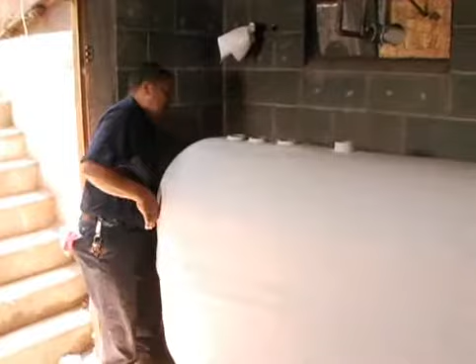This video provides general guidelines for the installation of fiberglass reinforced plastic above ground oil tanks. Throughout this video, we'll also refer to these as FRP tanks. NORA recommends that the specific instructions of the tank manufacturer and all applicable codes and regulations be diligently followed when installing any oil heat equipment.

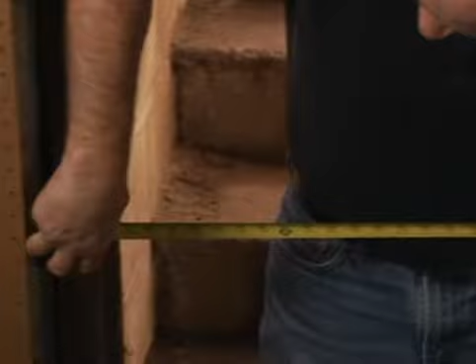Professional tank installations start well before the tank arrives at the job site. By the time the installer arrives to put in the tank, all of the following should have taken place. A company representative has visited the site to explain all of the options that are available, especially the advantages of inside installations. Choosing the right tank and the best location are important decisions, and the customer should be fully informed when making them.

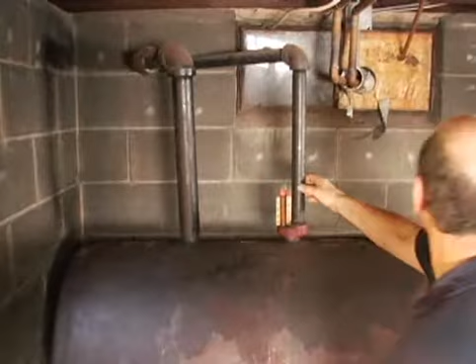It's critical to verify that the new tank will fit into the designated installation area and that a suitable, solid, and stable foundation is present, such as a poured concrete floor. The installation area should also be checked to ensure that all applicable regulations can be met and that oil delivery can be safely made.

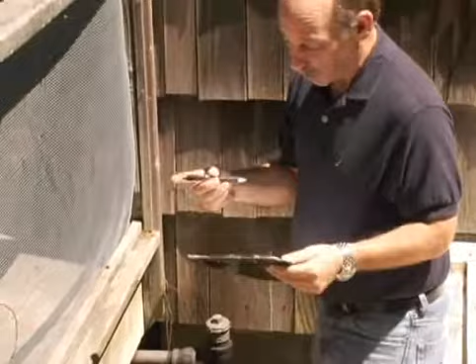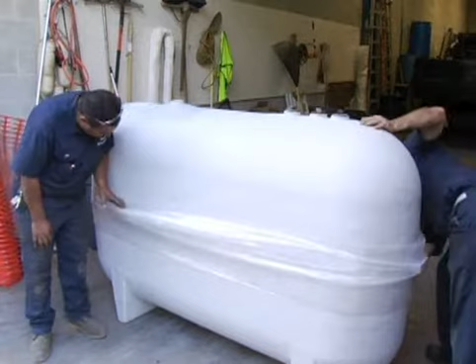Before the installation takes place, all necessary permits should be secured, and the customer's new tank must be received, inspected, and approved. Most importantly, the installers must thoroughly familiarize themselves with the current version of the manufacturer's instructions for the specific tank they will be installing.

The installation crew's job begins when they inspect the tank before loading it onto their vehicle. If any water has accumulated inside the tank, it should be drained at this time. A close visual inspection should follow to determine if there is any unacceptable damage. Unacceptable damage is defined as bruises, impact cracks, or deep scratches extending below the exterior coating of the tank.

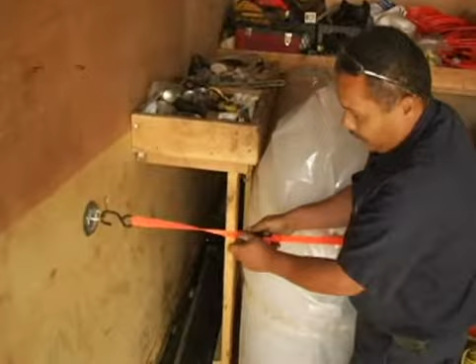Once they are satisfied that the tank is undamaged, they can carry it to their vehicle using the tank's integral handles. Tanks should never be dragged or walked. Once in the vehicle, the tank should be protected and secured to avoid damage during transport. Before heading for the job site, the crew should make sure that they have all necessary equipment and the correct materials in sufficient quantities for the installation.

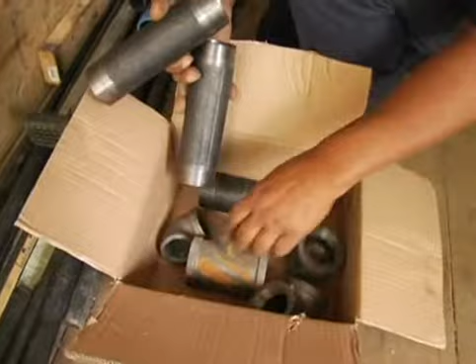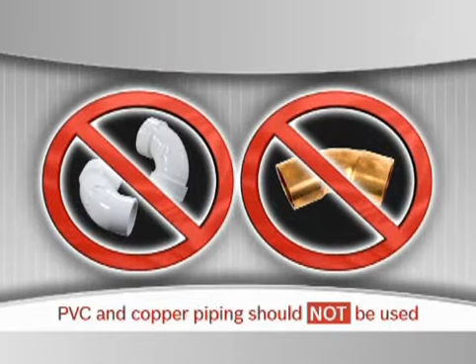Fill and vent pipes are typically Schedule 40 steel pipe connected with malleable fittings. Cast fittings used in steam systems can be easily broken and must not be used when piping oil tanks. PVC and copper piping should never be used for fill or vent piping of oil tanks.

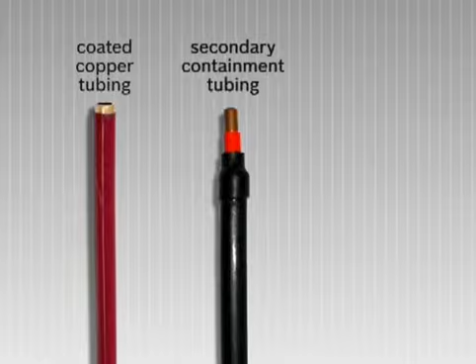In addition to the steel pipe, the crew will need coated copper tubing for the oil supply line, secondary containment if required, a vent alarm, a tank gauge, vent, and fill caps. Also needed are cement, caulking, pipe joint compound, and assorted fittings, nipples, valves, and plugs.

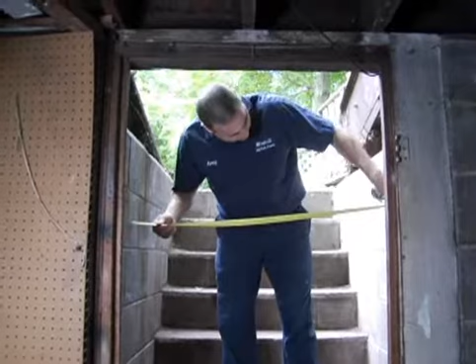Installations vary depending on whether the tank is installed indoors or outdoors. Let's look at an inside installation first. When the crew arrives at the job site, they should check the areas the tank will have to be moved through, as well as the installation site itself. Before moving in the new tank, it's critical to double-check to make sure that the tank will fit and be in compliance with applicable codes. Keep in mind that the tank must be installed on a flat, level, and stable surface, away from heat sources.

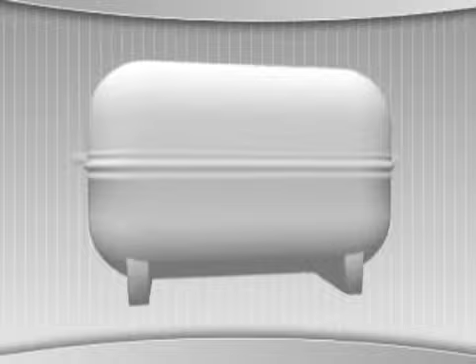Once the crew is satisfied that the installation can proceed as planned, the tank should be carefully removed from the truck and again inspected to be sure that no damage occurred during transportation. Tank testing should now be conducted. This illustration shows the test of a double-walled FRP tank. First, we'll test the integrity of the primary tank. Begin by capping off all the piping connections that aren't being used for the test.

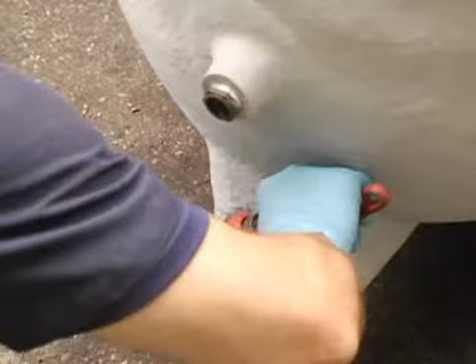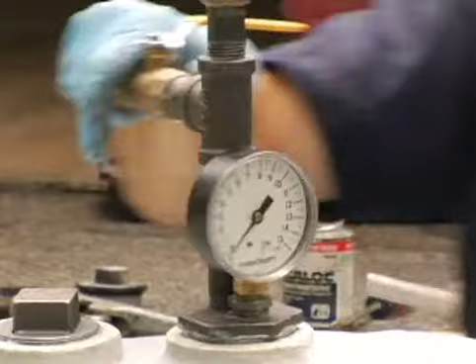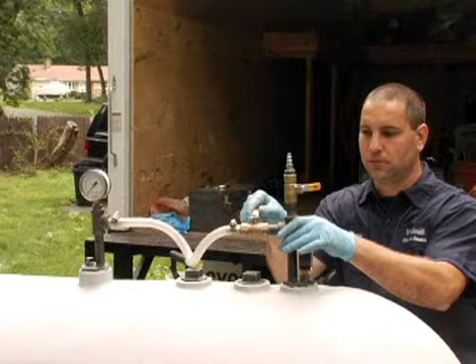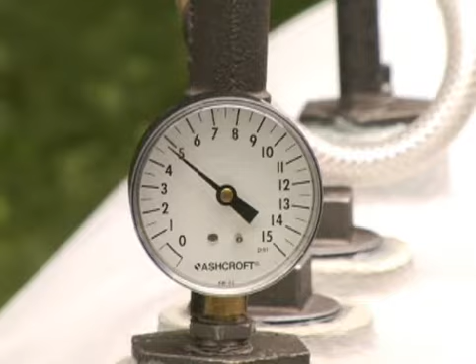Install test equipment consisting of a flow control valve, a 0 to 15 psi pressure gauge, a shutoff valve, an interstitial space test gauge, and a flexible air line connecting the shutoff valve to the vent for the interstitial space, that is, the space between the two tank walls. To begin the test, make sure the shutoff valve is closed to isolate the interstitial space. Pressurize the primary tank to a maximum of 5 psi by opening the control valve. When the pressure reaches 5 psi, close the control valve and remove the pressure source.

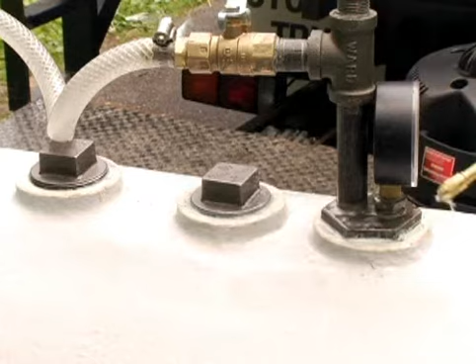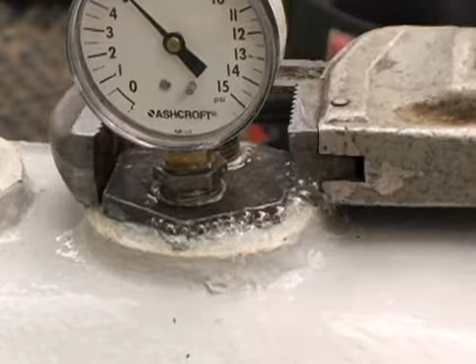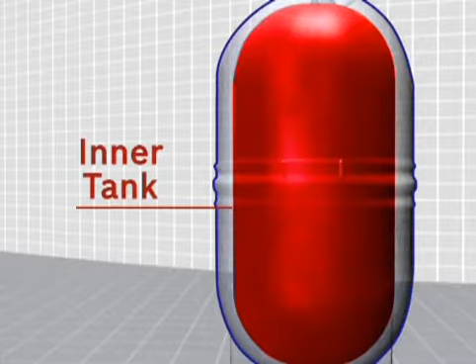Apply a 40:1 solution of water and dishwashing liquid to all the plugged connections. If continuous bubbling is observed at any of the plugged connections, carefully tighten the plug until no more bubbles are observed. If a decline in pressure is observed, or if the interstitial space gauge reads pressure, stop the installation and have your supervisor contact the tank manufacturer. If the pressure holds, the primary tank has passed its test. Following the test of the primary tank, it is critical to test the integrity of the interstitial space. Again, that's the space between the walls of a double-walled tank.

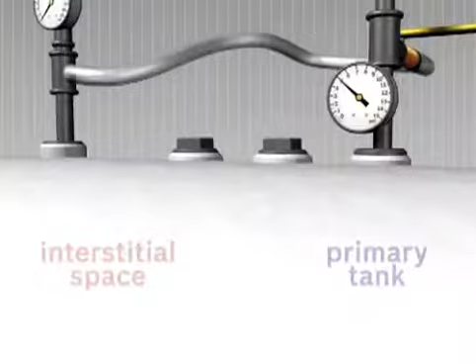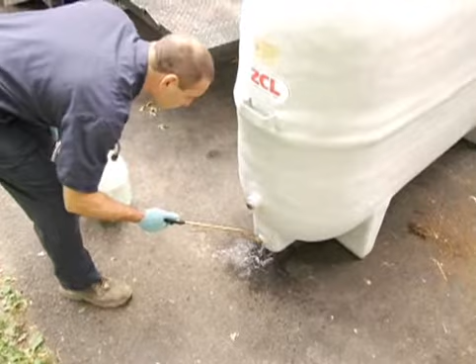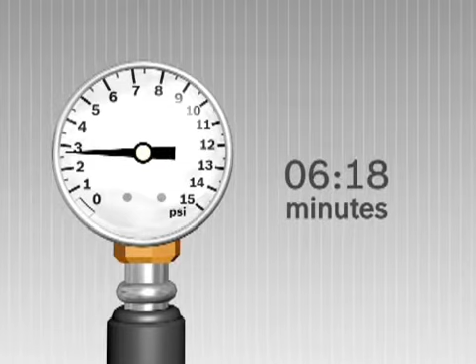Begin this test by opening the shutoff valve and allowing the air from the primary tank to pressurize the interstitial space. Again, apply the soap solution to all threaded connections and tighten as required if bubbling occurs. Observe the interstitial space pressure gauge for a period of 30 minutes, and if there is a decline in pressure, notify your supervisor and await instructions before proceeding with the installation.

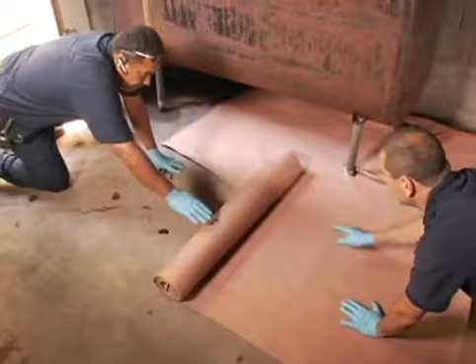If the pressure holds, the installation can proceed. Use this testing time to collect and inspect all fittings and accessories necessary to complete the installation. The work area and any living areas that the crew will be traveling through should be protected to avoid damage and simplify cleanup. In case there's an unforeseen problem, it's advisable to bring the new tank to the installation area before beginning to remove the old one.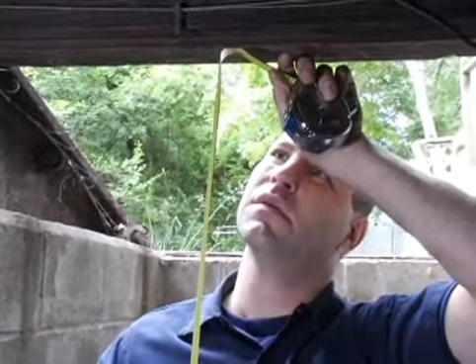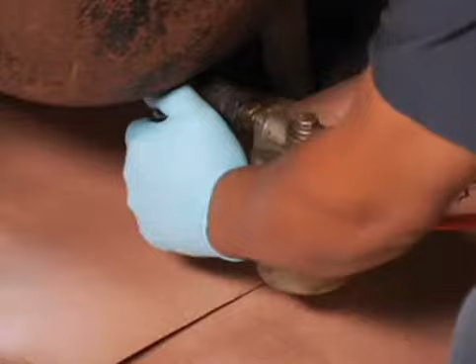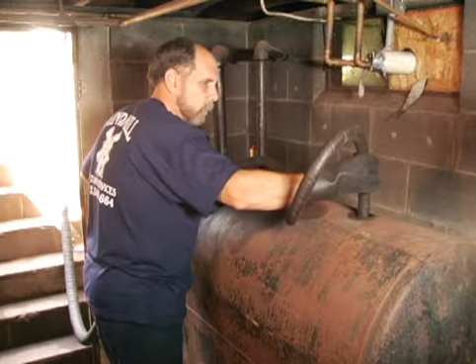If there's not enough room for both tanks, measurements and clearances should again be checked to ensure that the new tank will fit and can be properly piped. Before the old tank is disconnected, the tank valve should be closed, the heating system should be turned off, and any oil remaining in the old tank should be removed and properly disposed of. Pump overs should be avoided.

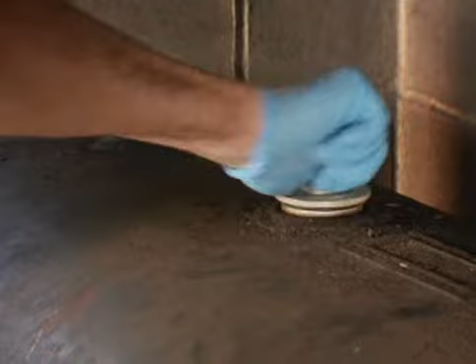The oil lines, fill, and vent pipes should be disconnected, safely drained, and properly disposed of. NORA recommends that old oil lines should never be reused with a new tank. Once the old tank is empty and all attached piping has been disconnected, all tapping should be plugged. The tank should then be wrapped in plastic or other protective material to prevent damage to the customer's property as it is removed from the premises for proper disposal.

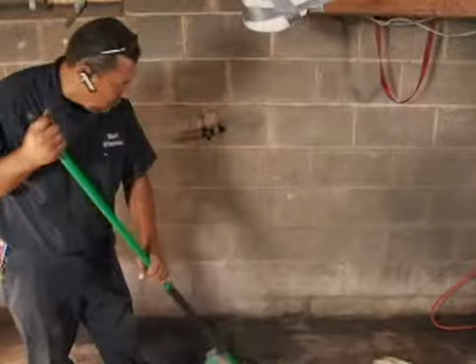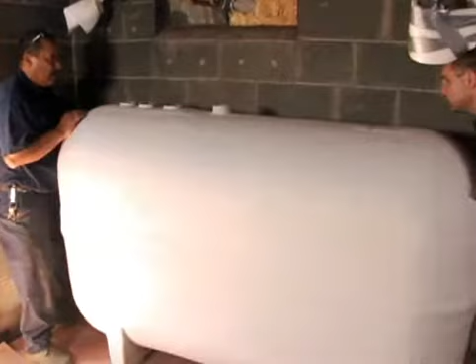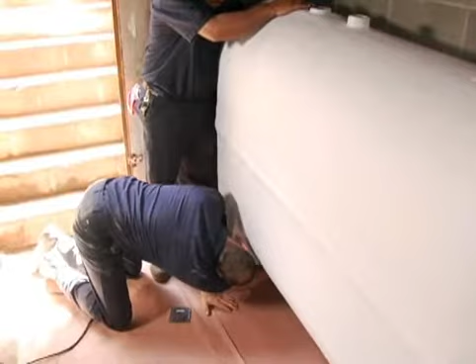To begin the installation of the new tank, the installers should clean the area to clear away any debris. The new tank should then be carefully brought to an upright position and set in place, so that the tank label will be clearly visible after installation is complete. Although corrosion from accumulated water is not a factor with FRP tanks, it is still good practice and often a code requirement to slope the tank toward the outlet end.

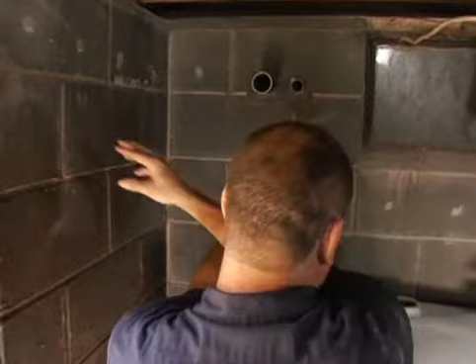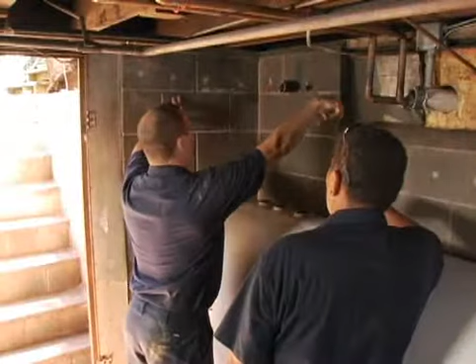Before beginning to pipe the tank, the installers must verify that it is at least 5 feet from any heat source, and at least 2 inches from any walls or obstructions to allow for service and inspections. Start tank piping by removing all shipping plugs and determining which openings will be used for the fill, vent, oil lines, and tank gauge. Double-walled FRP tanks also require venting of the space between the 2 tank walls, so this tapping should be identified.

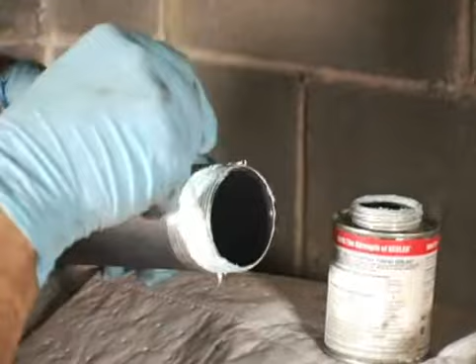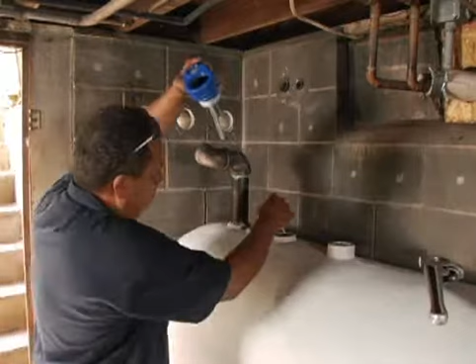All piping must be tightly connected using pipe joint compound and properly aligned with its connection to the tank. Next, a vent alarm should be installed into the tank. The fill and vent pipes should be constructed using swing joints to provide a minimum of 1% downward pitch toward the tank to avoid traps. The new pipes are run to the outside of the premises, where they should terminate close to the building with the proper fittings and caps.

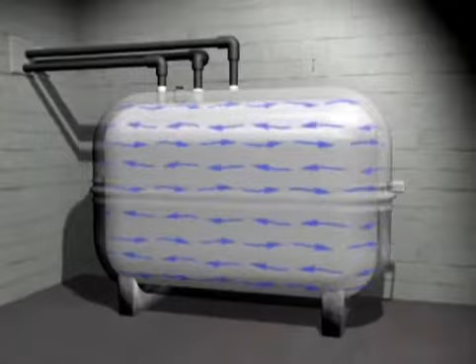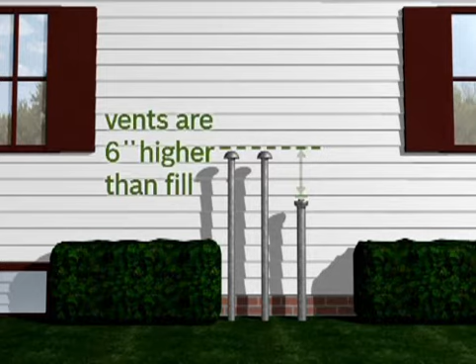Remember, double-walled FRP tanks have the additional requirement to vent the space between the 2 tank walls to the atmosphere. Follow the manufacturer's instructions for installing another vent line to the outside. Note that the fill point should be at least 3 feet above ground level. The vent should be positioned next to and 6 inches higher than the fill pipe. Both should be a minimum of 2 feet from any building openings and at least 5 feet from any flue gas outlet or appliance air inlet.

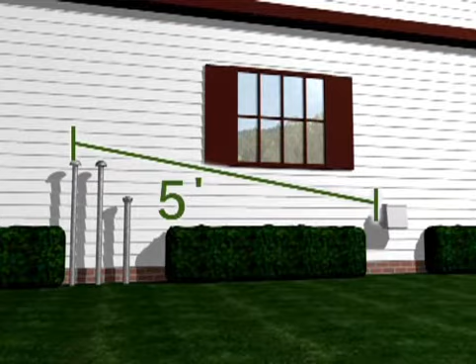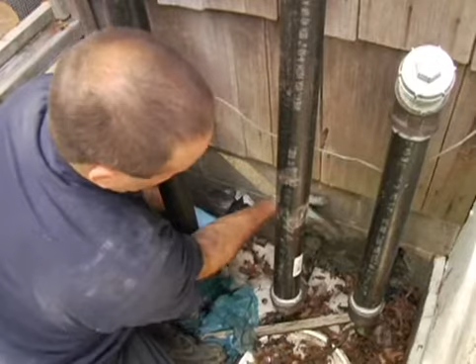Once the fill and vent piping have been completed, caulking or cement should be applied to the inside and outside areas where the pipes pass through the wall. If a combination vent alarm and gauge has not been installed, a fuel level gauge should now be installed into the tank. At this time, any unused tapping should be properly plugged using pipe joint compound.

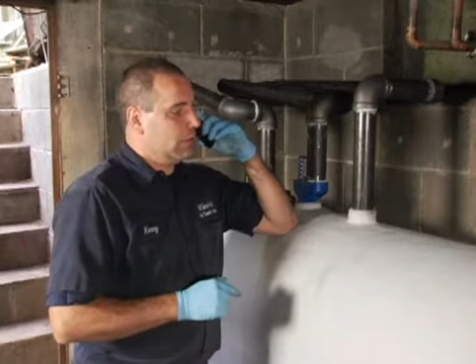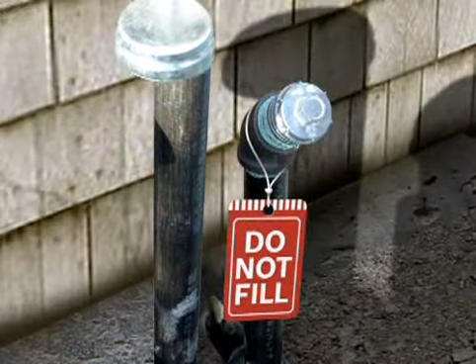For the sake of efficiency, this is the time to call for a delivery, as the tank is now ready to accept oil. If no delivery is planned when the tank is installed, the fill pipe should be tagged with a notice indicating that the tank should not be filled unless a qualified service technician is present to witness the first fill.

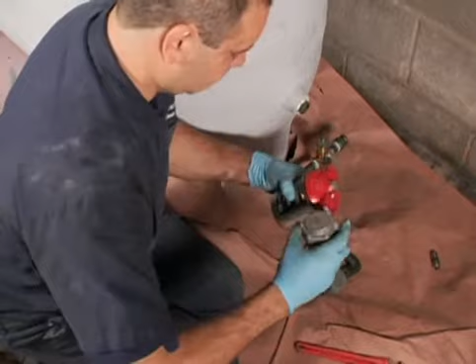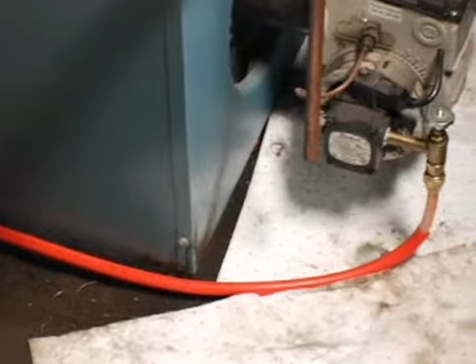An oil shutoff valve and a new oil filter should be installed at the tank. An oil safety valve is strongly recommended to prevent the tank from siphoning. It should be installed in accordance with the manufacturer's instructions. A new oil line should be run as directly as possible from the tank to the oil burner, following the piping recommendations of the fuel unit manufacturer. It's always best to use a solid line with no couplings or unions for the entire run. At the burner, the oil line should be connected to a fusible valve at the fuel pump.

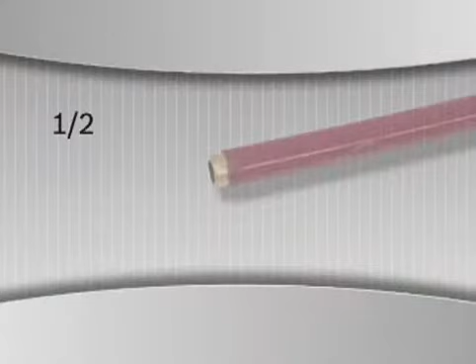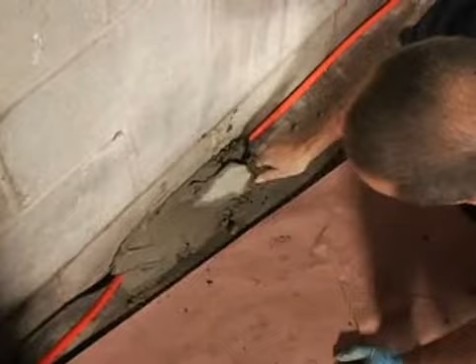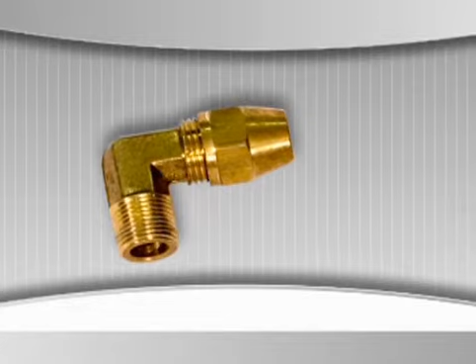For most installations, 1/2 inch OD coated copper piping is preferred. At a minimum, the line must be 3/8 inch OD. Oil lines should be fastened in place to avoid accidents and damage. If copper tubing has to be buried in or will come in direct contact with concrete, it must be corrosion resistant. All copper tubing connections must be visible, accessible, and made tight with flare fittings. Compression fittings must not be used.

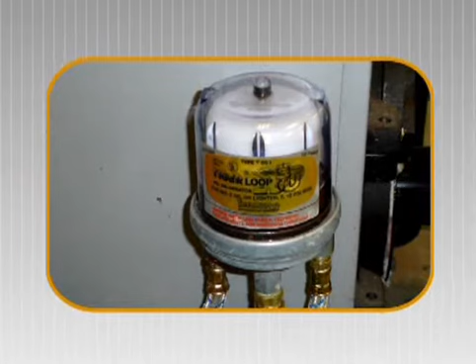It is not a good practice for 2 or more oil burners to share an oil line. Individual lines should be run from the tank to each burner. In some situations, the oil line is run overhead to the oil burner instead of along the floor. This may occasionally cause the fuel unit to become air-bound and lose its prime. In such installations, it's advisable to use oil de-aerators to eliminate air from the oil line before it reaches the fuel unit.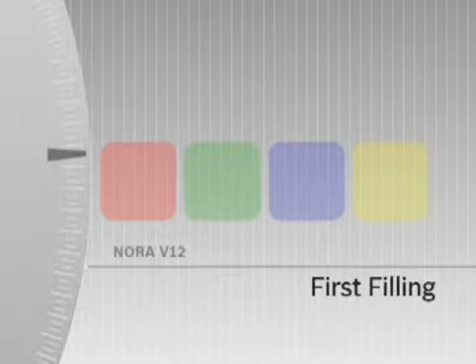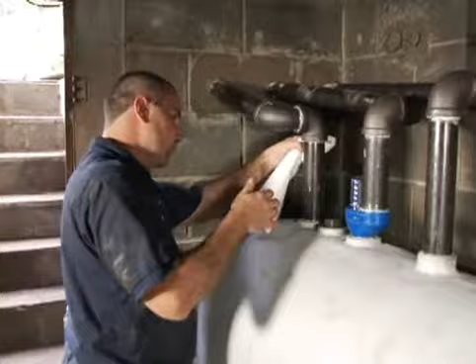When the oil truck arrives, the installer should carefully observe the tank and piping while the tank is being filled to capacity and should tell the delivery person to stop immediately if there's a problem. Proper vent whistle and tank gauge operation should be verified at this time. If no deficiencies are found during the filling, the oil valve can be opened and the oil line bled.

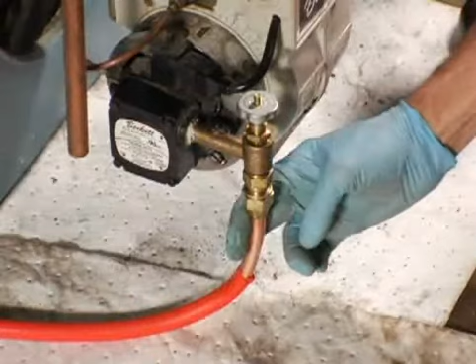Once the air has been completely purged, the installer should verify that there are no leaks in the oil line. The burner should then be adjusted and a full efficiency test performed. At least 15 minutes after the delivery is completed, the installer must again check the tank and piping for leakage, paying particular attention to joints and fittings.

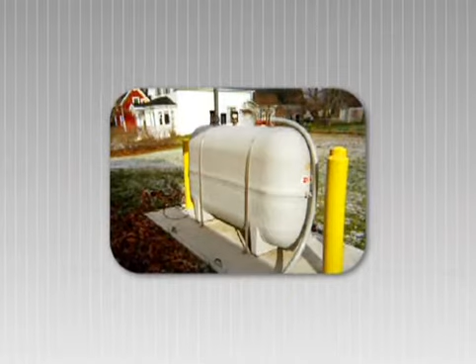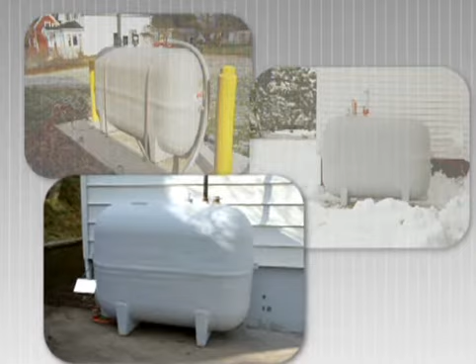There are some important differences in installation procedures and additional factors that must be considered when installing a fiberglass reinforced plastic tank outdoors. Be sure to check local regulations for specific outdoor tank installation requirements. In general, the tank must be properly secured to a cement pad that extends 6 inches beyond the edge of the tank on all sides. A tie-down is recommended for tanks installed in areas with a risk for high winds or flooding.

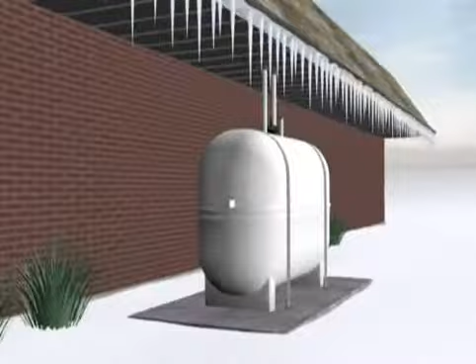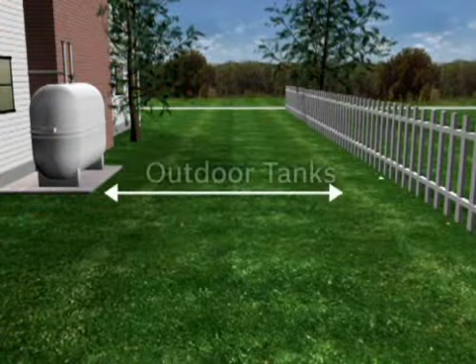Despite its inherent weather resistance, an FRP tank should be positioned so that it will not be subject to falling ice, snow, or dripping water. Outdoor oil lines should be insulated. Setbacks from property lines must be observed, typically 5 feet for tanks up to 275 gallons and 10 feet for tanks up to 660 gallons. Check for required setbacks from other fuel tanks. Tanks must not block building entrances or windows. If it is installed in an area exposed to vehicular traffic, the tank should be protected with bollards.

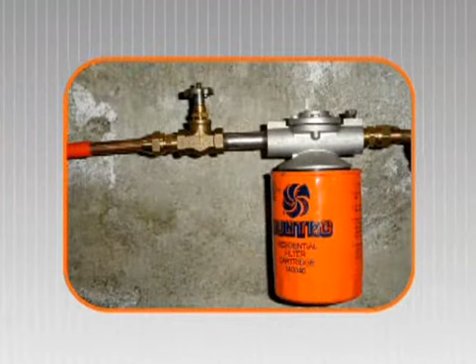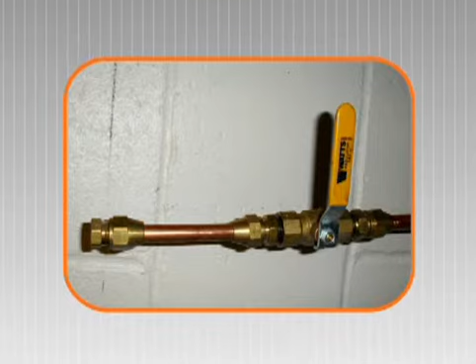A shutoff valve, a new oil filter, and an optional oil safety valve should be installed inside where the oil lines enter the building. One of the oil lines should be connected to the valve. The other should be plugged and reserved for future use, unless there are multiple oil burners, in which case individual lines should be run from the tank to each burner.

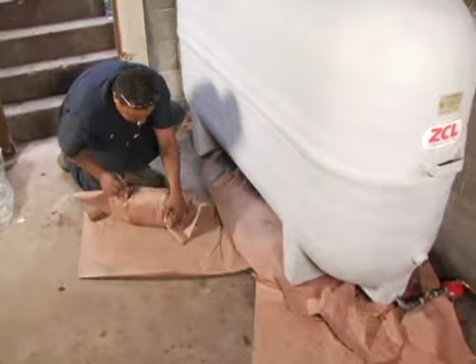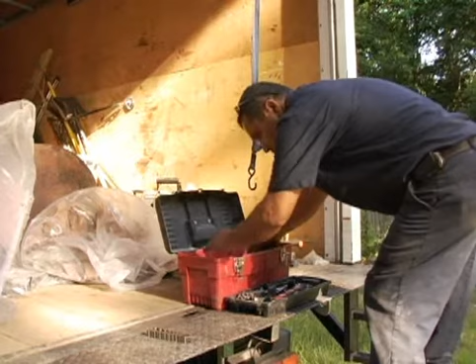Following tank installation, the work area should be thoroughly cleaned and all debris removed from the premises for proper disposal, and all tools and equipment returned to their proper places in the service truck. The customer should be advised on the importance of keeping the area around the tank clean and of keeping the path to the fill pipe clear. The installer should also explain that the tank is the customer's responsibility. It must be checked periodically, with any drips or odor being immediately reported to the oil company.

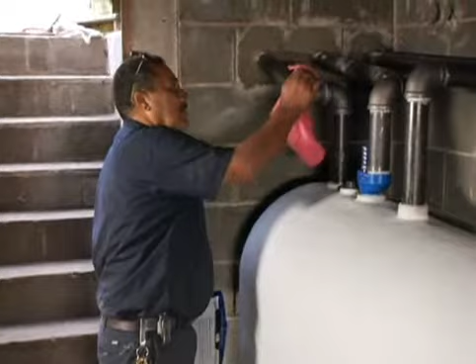After completing the necessary paperwork and giving copies to the customer, the installer should take one last look around to verify that there are no leaks or discrepancies, and that all tools, equipment, and installation debris have been removed. This video has shown the proper procedures for indoor and outdoor installation of above-ground fiberglass reinforced plastic oil tanks. Local codes and regulations must always be followed when installing oil heat equipment. If this video recommends or omits a practice that causes a violation of the codes in your area, remember that the local authority has the final say, and its regulations must be followed.

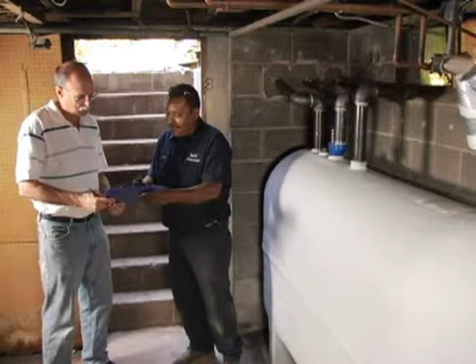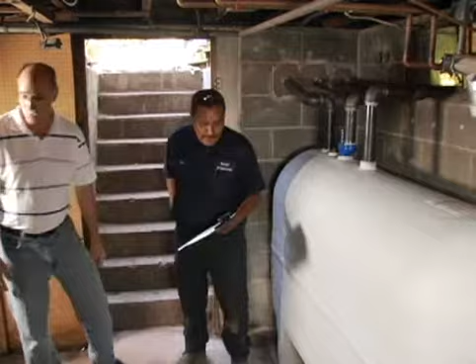But proper tank installation is just the beginning. To assure that our oil heat customers have an ample supply of safely stored fuel, all oil tanks must be visually inspected on a systematic basis, and any deficiencies corrected before they have the chance to cause problems. NORA recommends 3 levels of inspection for all customer oil tanks: an initial inspection of a tank before your company fills it for the first time, an inspection during each heating system tune-up, and a brief inspection before each oil delivery. The flexibility of providing on-site storage is one of oil heating's greatest advantages. The proper installation and maintenance of customers' oil tanks demands total commitment from everyone in our industry.